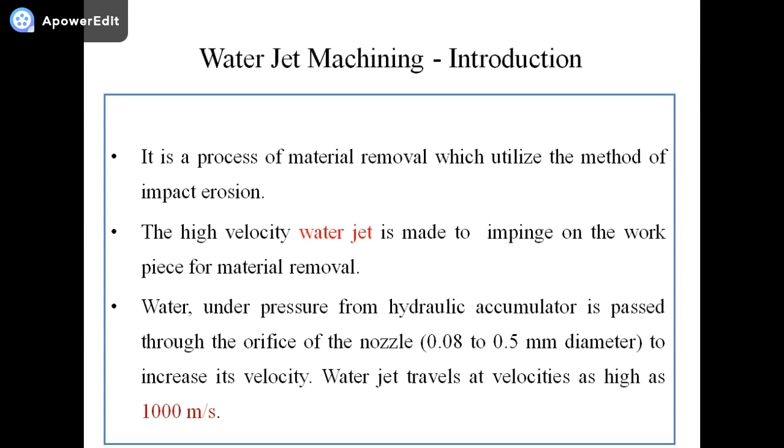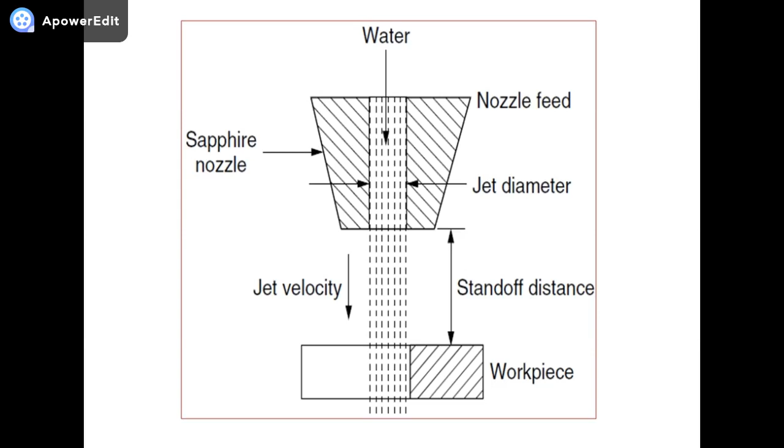The water jet machining process involves directing a high pressurized high velocity water jet to the surface to be machined. Here the velocity of the water jet should be in the range of 540 to 1400 meter per second. This velocity is much faster than the speed of bullets even, and the pressure of the water is increased up to 150 to 1000 megapascal inside the intensifier.

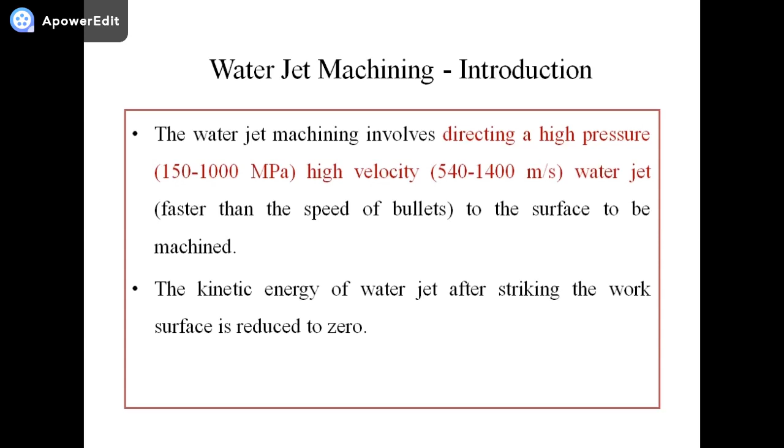The kinetic energy of the water jet, after striking the work surface, will obviously reduce to zero. The bulk of the kinetic energy of the jet is converted into the pressure energy. Then it is allowed to pass through the nozzle and it finally impinges on the workpiece surface. Local pressure caused by the water jet exceeds the strength of the surface which is being machined. Then the material from the surface gets eroded and the cavity is formed.

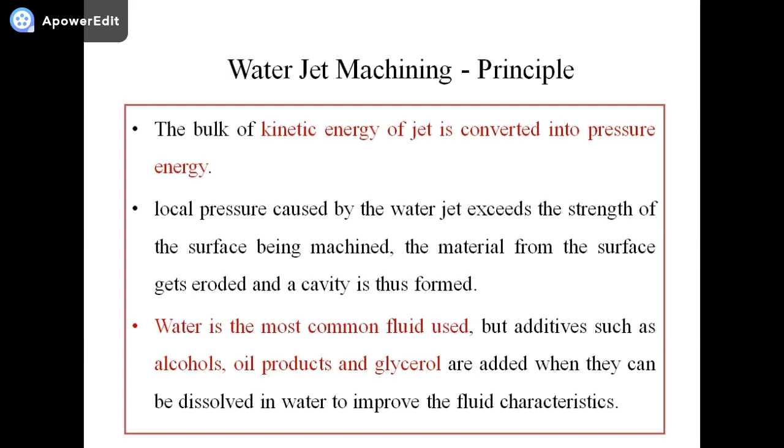Water is the most common fluid used in water jet machining, but additives can be used such as alcohol, oil product and glycerol, which are added when they can be dissolved in water to improve the fluid characteristics.

Here are the list of equipments, the components of water jet machining process. They include the hydraulic pump, intensifier, accumulator, high pressure tubing set, jet cutting nozzle and catcher. Let us learn these equipments one by one in detail.

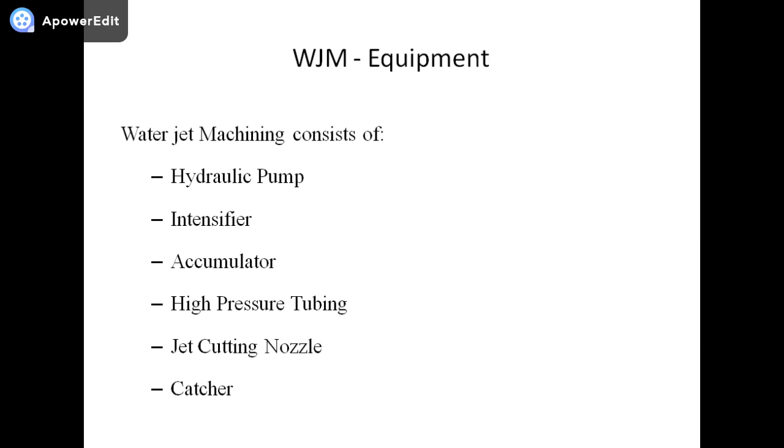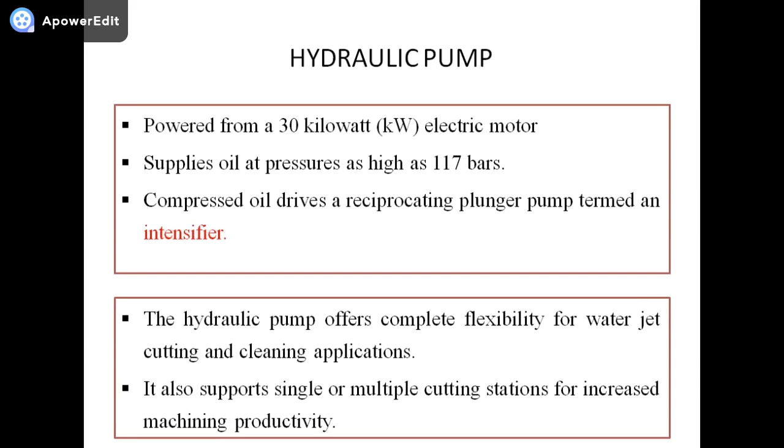The hydraulic pump is powered from a 30 kilowatt electric motor. It supplies the oil at pressure as high as 117 bar, and the compressed oil drives the reciprocating plunger pump which is termed as an intensifier. The hydraulic pump offers complete flexibility for water jet cutting and cleaning operation. It also supports single or multiple cutting stations for increased machining productivity.

The intensifier accepts the water at very low pressure, typically 4 bar, and expels it through an accumulator, and higher pressure around 3800 bar can be achieved. The intensifier converts the energy of the low pressure hydraulic fluid into ultra high pressure water. The hydraulic system provides the fluid power to the reciprocating piston in the intensifier center section.

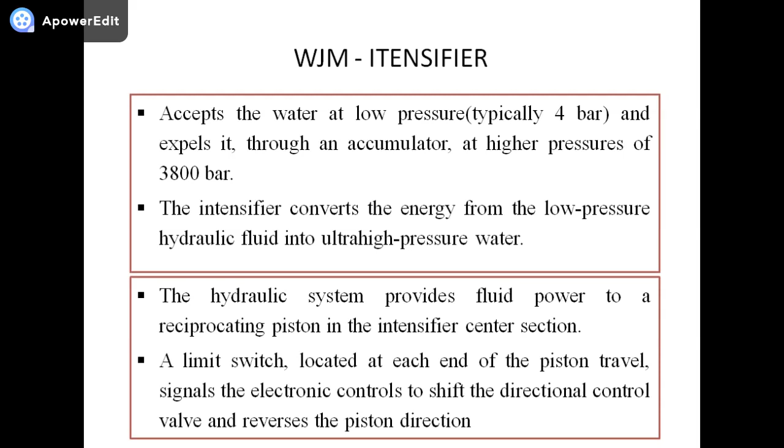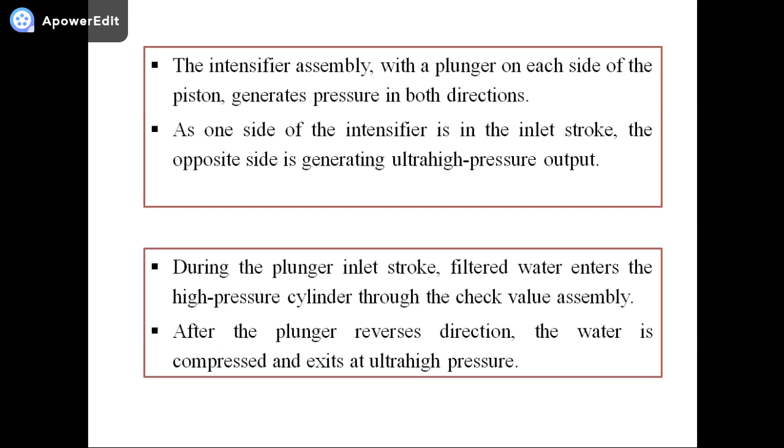The limit switch located at the end of the piston travel signals the electronic control to shift the direction control valve and reverse the piston direction. The intensifier assembly, with a plunger on each side of the piston, generates the pressure in both directions. As one side of the intensifier is in the inlet stroke, the opposite side is generating ultra high pressure output. During the plunger inlet stroke, filtered water enters the high pressure cylinder through the check valve assembly. After the plunger reverses direction, the water is compressed and it exits at ultra high pressure. So this is the function of intensifier, where the pressure is increased.

Then the accumulator, which is also used in water jet machining process. The high pressure accumulator is provided in the system to avoid the pulsation of the water flow at the beginning of each stroke, which is caused by the compression of water at very high pressure. Accumulator generally serves as a surge tank, and it maintains the continuous flow of high pressure water, and it eliminates the pressure fluctuation within plus or minus 5%.

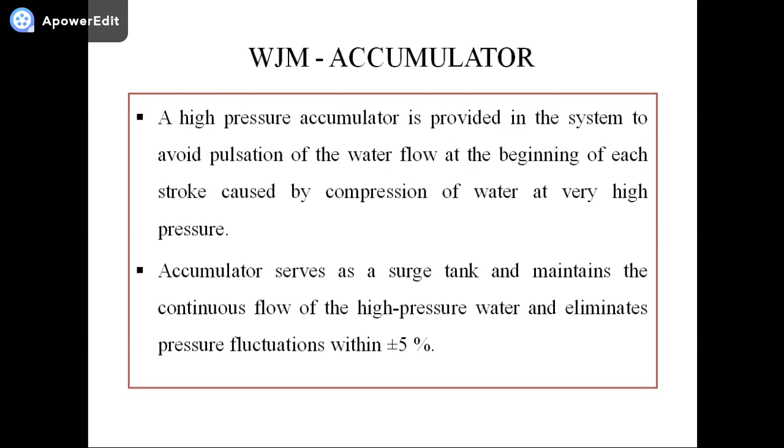This pressurized high velocity fluid generally passes through tubes and pipelines. The pressure tubing transports the pressurized water to the cutting head. The tube diameters may vary from 6 mm to 14 mm. The equipment allows flexible movement of the cutting head, and the cutting action is controlled either manually or through the remote control valve specially designed for this purpose.

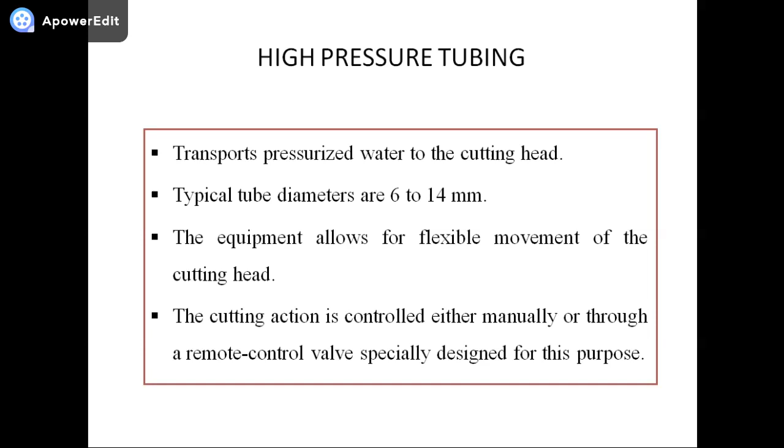The nozzle utilized in the water jet machining process also possesses a few important characteristics. They are generally made from synthetic sapphire, which we have already discussed. In abrasive jet machining process, also the same kind of nozzle is used. It provides a coherent water jet stream for optimum cutting of soft material that is considered unmachinable by conventional methods. About 200 hours of operation are expected from a regular nozzle, which becomes damaged by particles of dirt and the accumulation of mineral deposit on the orifice due to erosive water hardness.

Sometimes water jet machining process also uses abrasive particles in the process. In that case, the erosion of the nozzle takes place very fast. That's why the life of the nozzle is very limited.

The compact design of the water jet cutting head promotes integration with motion control systems, ranging from 2-axis tables to sophisticated multi-axis robotic installations.

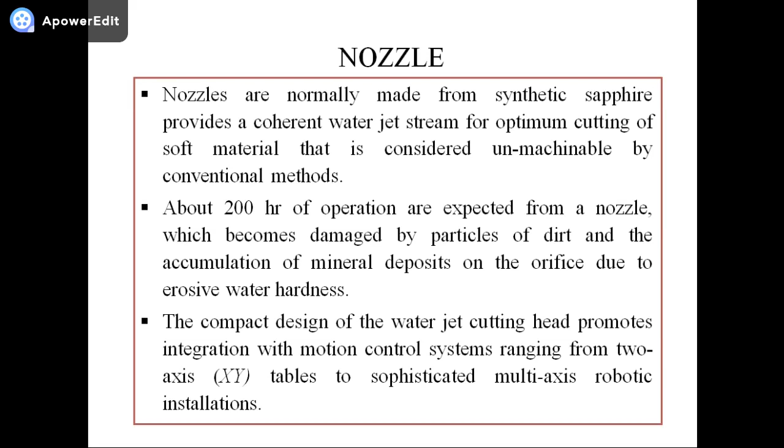The catcher used in the system acts as a reservoir for collecting the machining debris coming out from the workpiece after the cutting process. Three types of catchers are used: one is the basin type, another is steel, WC, or ceramic ball, and plates are also used.

Moreover, it reduces the noise level up to 105 decibels, which is associated with the reduction in the velocity of the water jet from Mach 3 to subsonic level.

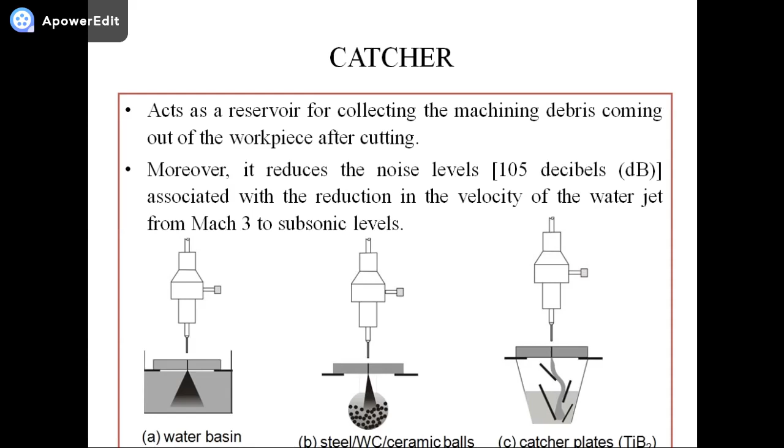These are a few process parameters associated with the water jet machining process. It includes the jet fluid, which is used in water jet machining for the purpose of material removal. Then there is the jet nozzle, from where the fluid is passing, which is also one of the concerned process parameters to take care about. And finally the workpiece.

Upon these process parameters, the material removal rate and the quality of the machined surface are dependent. In case of jet fluid, what kind of jet fluid is used, what is the velocity, what is the flow rate of the fluid, what is the pressure intensity maintained throughout the process, what is the viscosity of the fluid—these are a few process parameters related to the jet fluid which directly or indirectly affect the output result.

Then the nozzle has various dimensions, meaning diameter, and what standoff distance is maintained. These are also process parameters which affect the output or response. And obviously the characteristics of the workpiece material—type of workpiece material, thickness, feed rate—these are all process parameters which ultimately result in the material removal rate, surface quality of the machined surface, and the accuracy which should be achieved.

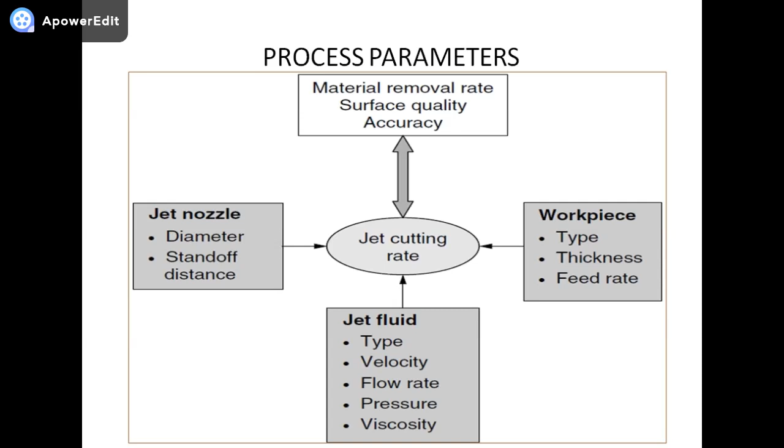Standoff distance is the gap between the jet nozzle and the workpiece. It should be in the range of 2.5 to 6 mm, which is recommended. The nozzle diameter is also suggested as 0.1 to 0.3 mm. However, for material used in printed circuit boards, it may be increased to 13 to 19 mm.

But the larger the standoff distance, the smaller would be the depth of cut. When cutting fiber reinforced plastic, reports show that increasing the machining rate and using a small nozzle diameter increases the width of the damaged layer.

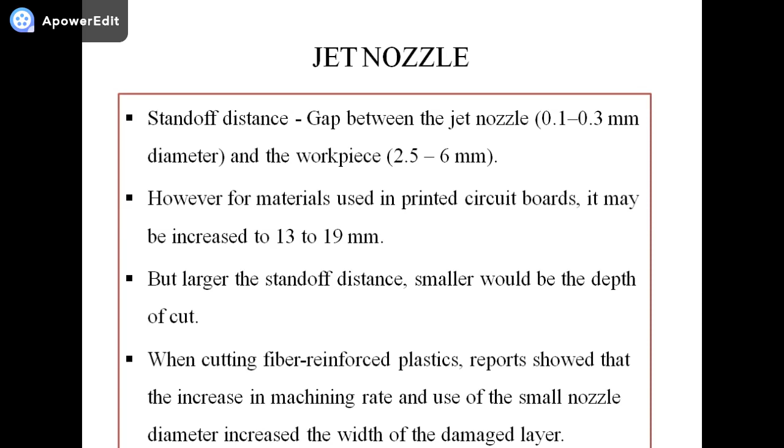The jet fluid used in this water jet machining process must possess few characteristics, like the pressure typically used is in the range of 150 to 1000 megapascal to provide 8 to 80 kilowatt of power. For a given nozzle diameter, increased pressure allows more power to be used in the machining process, which in turn increases the depth of cut.

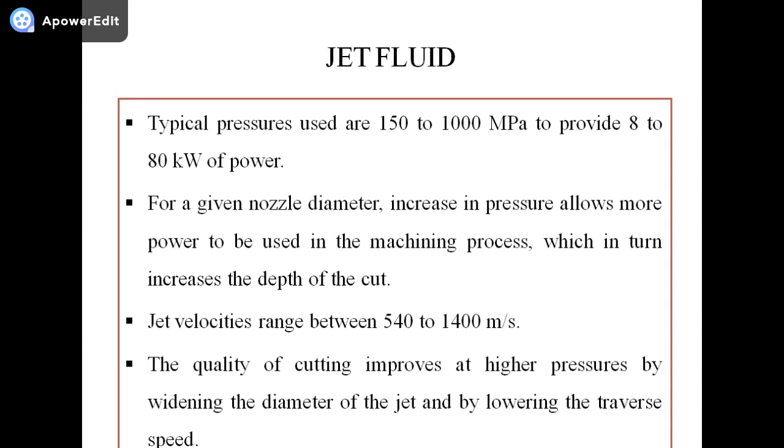Jet velocity must be maintained in the range of 540 meter per second to 1400 meter per second. The quality of cutting improves with higher pressure by widening the diameter of the jet and by lowering the traverse speed. Under such conditions, material of greater thickness and density can be cut. Moreover, the larger the pump pressure, the greater the depth of cut that can be achieved.

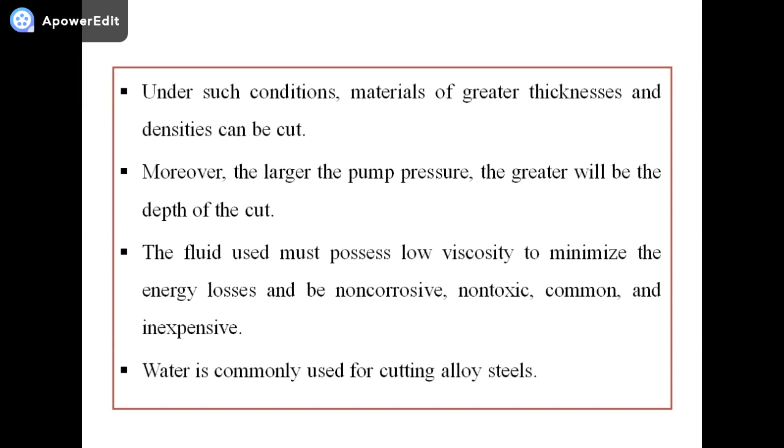The fluid used must possess low viscosity to minimize energy loss, and be non-corrosive, non-toxic, commonly available, and inexpensive. For this purpose, water is commonly used for cutting alloy steels.

The workpiece material: the type that can be machined is brittle material that will fracture, while ductile material will cut well. The thickness of the material should be in the range of 0.8 to 25 mm or more.

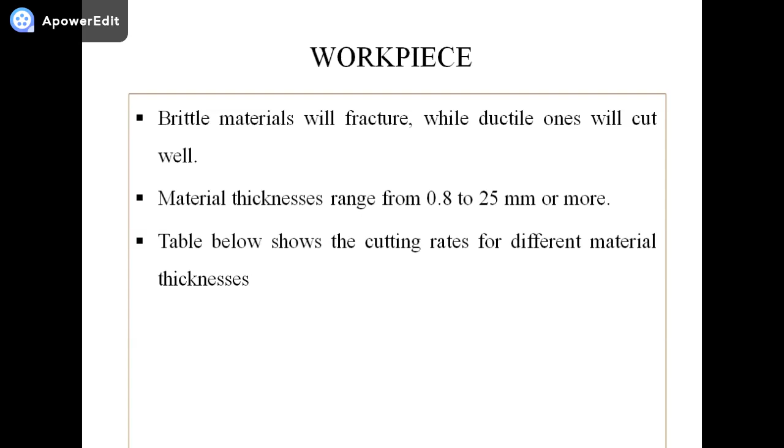The applications of water jet machining are obviously for cutting metal plates, clothes, leathers, rubbers, plastic, food items, and ceramics. It is a versatile and cost effective cutting process that can be used as an alternative to traditional machining methods.

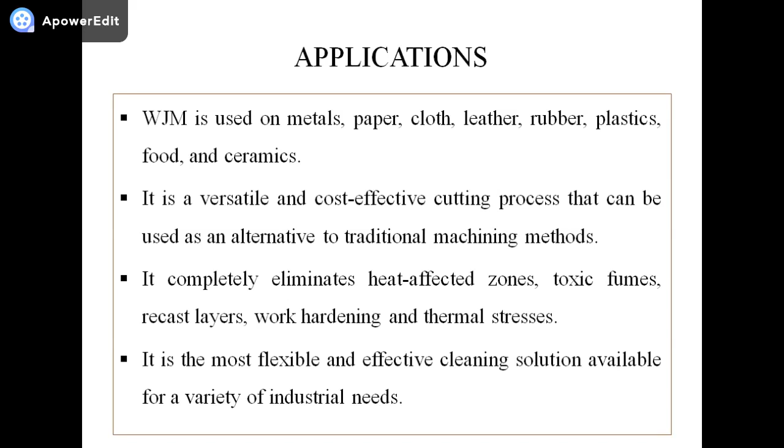It completely eliminates the heat affected zone, toxic fumes, formation of recast layers, work hardening, and thermal stresses. This process is completely free from these parameters. It is the most flexible and effective cleaning solution available for a variety of industrial requirements.

To cut ferrous and non-ferrous plates, composites, thermoplastics, high-strength alloys, ceramics, and a wide range of food products, the water jet machining method is very much suitable.

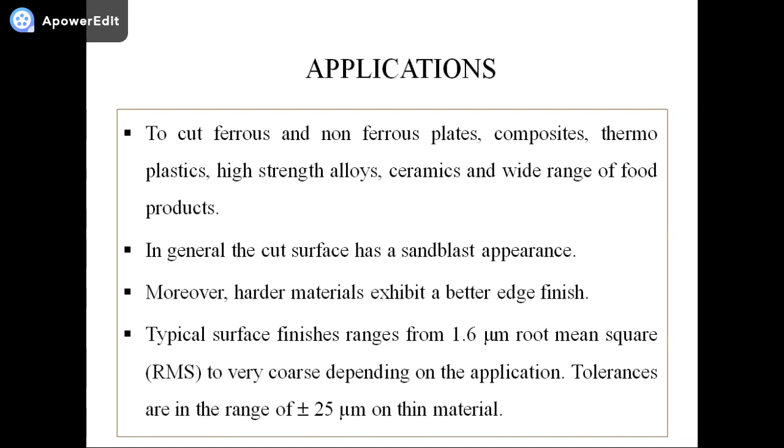In general, the cut surface has a sandblast appearance. Harder materials exhibit better edge finish. Typical surface finish ranges from 1.6 micron RMS to very coarse depending on the applications. Tolerances in the range of plus or minus 25 micron on thin material can be achieved with the help of water jet machining process.

It has multi-directional cutting capacity. The process produces no heat while machining. Cuts can be started at any location without the need of a pre-drill hole. This is one of the important aspects of water jet machining. A pre-drill hole is not required for drilling purposes.

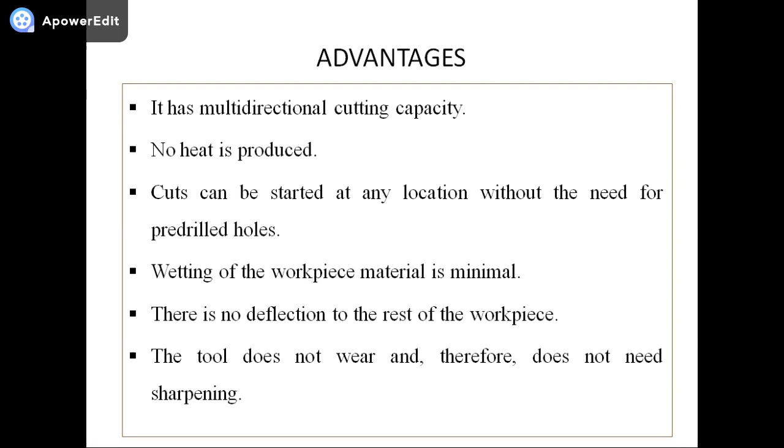Wetting of the workpiece material is minimal. There is no deflection to the rest of the workpiece, and the tool does not wear and therefore does not need sharpening again and again. The process is environmentally safe. Hazardous airborne dust, contamination, and waste disposal problems that are common when using other cleaning methods are eliminated.

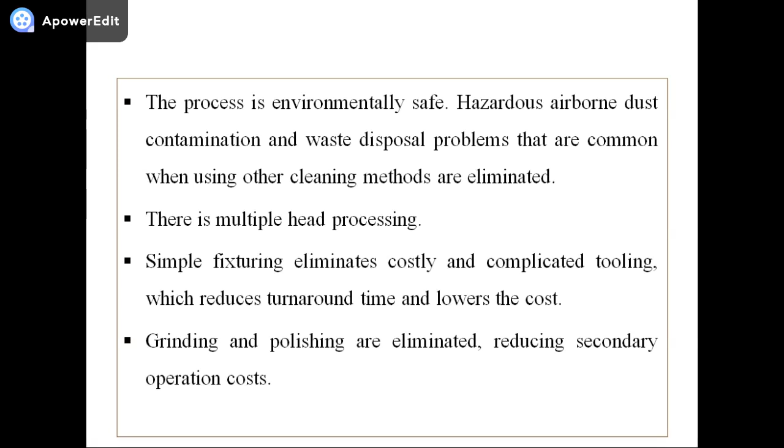There is multiple head processing. Simple fixturing eliminates costly and complicated tooling while reducing turnaround time and lowering overall cost. Grinding and polishing are completely eliminated, so reducing secondary operation cost is also possible with the help of this water jet machining process.

Few limitations are also associated with the process. Let us look quickly: very thick parts cannot be cut with water jet cutting. If the part is too thick, the jet may dissipate and cause cutting on a diagonal, or have a wider cut at the bottom of the part than the top. It can also cause a rough wave pattern on the cut surface.

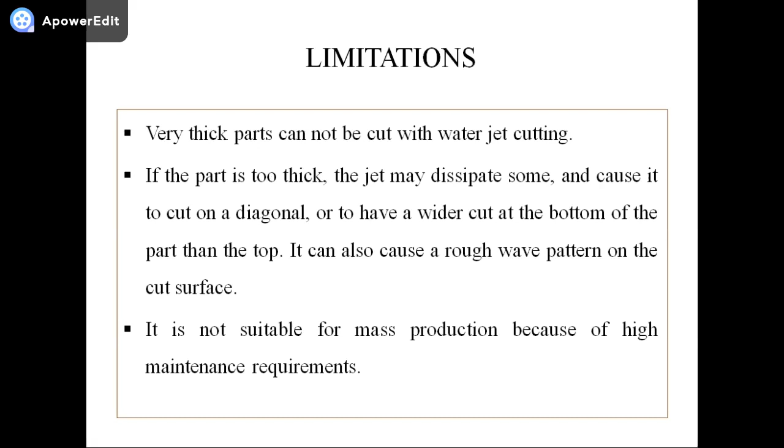It is not suitable for mass production because high maintenance is required. One more limitation which is very critical: noise can easily reach a very high decibel level, so it requires a sound shielded unit, or the worker must use an ear protection device.

The consumption of water is very high as it is water jet machining. Typically it uses 5 to 10 liters per minute of water, with around 70% evaporation taking place. So only 30% of the water we can collect and reutilize, but 70% of the water in that case will be evaporated.

So these are the few limitations of water jet machining process, but after all this process is very useful for various purposes.